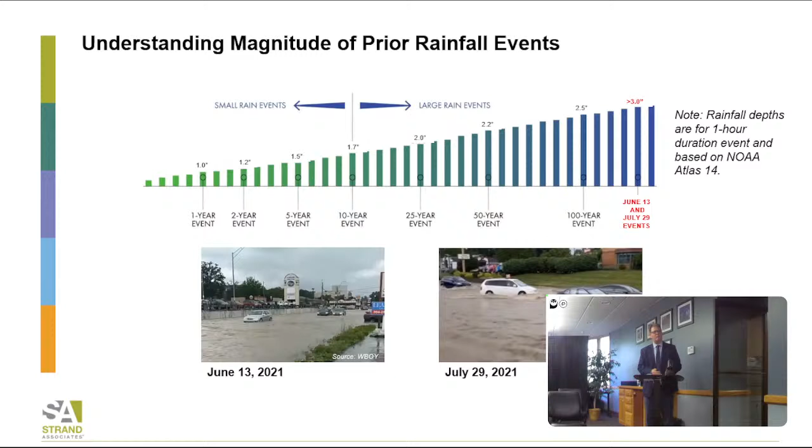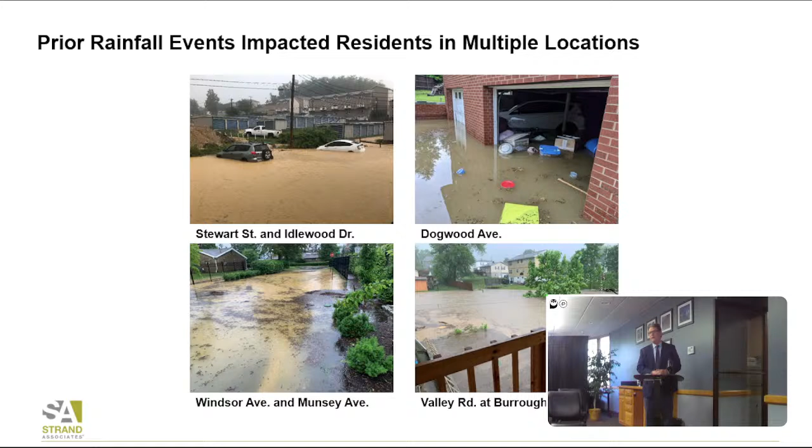Next slide, please. So the rainfall events impacted many different locations. These are photos taken either by MUB staff or by concerned citizens. Stewart Street and Idlewood, Dogwood Avenue, Windsor Avenue and Munsey, Valley Road at Burroughs. So there was significant flooding, which resulted in significant property damage for those homeowners. Next slide, please.

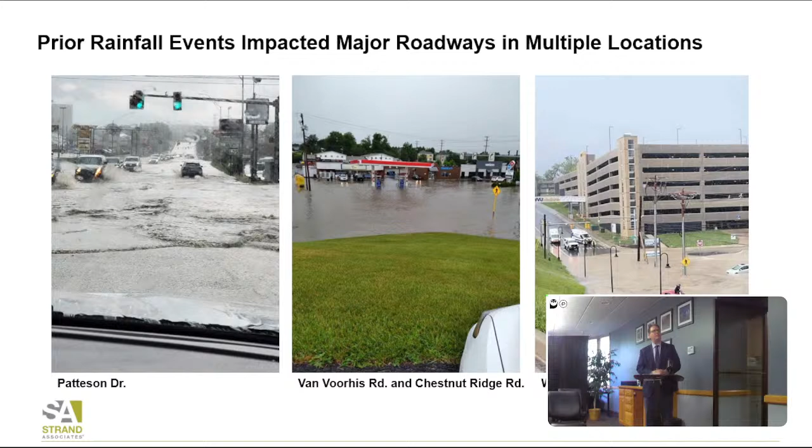Rainfall events also impacted major roadways in multiple locations. Patteson Drive, Van Voorhis at Chestnut, Willowdale and Valley View Avenue. All of those areas had significant flooding. You can see on the far right, Willowdale and Valley View, somebody's sitting on top of their car trying to figure out how to get out of that. So that was obviously a pretty significant event, and it impacted a lot of people in the city. Next slide.

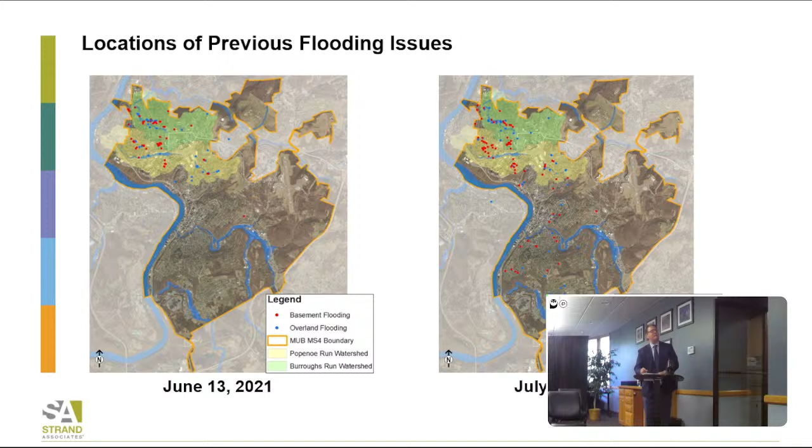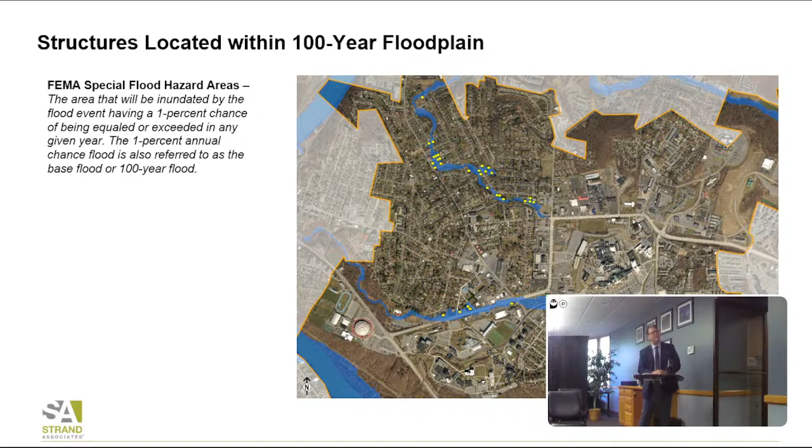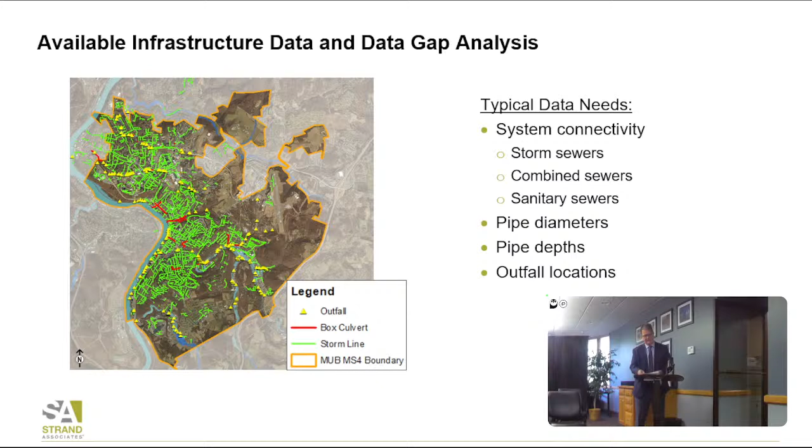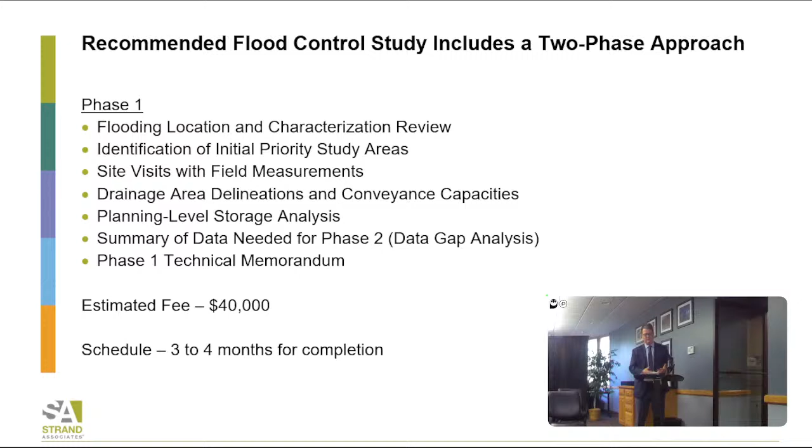There's obviously site visits and field measurements, drainage area delineations, conveyance capacity. There'll be a planning level storage analysis, so storage of various rainfall events. And then an identification of any additional data that's required for phase 2. It would wrap up in a technical memo. I think you've got an agreement or a task order in your packets where you could read more about this scope if you'd like. The estimated fee for this first phase is $40,000, and we anticipate it would take 3 to 4 months to complete.

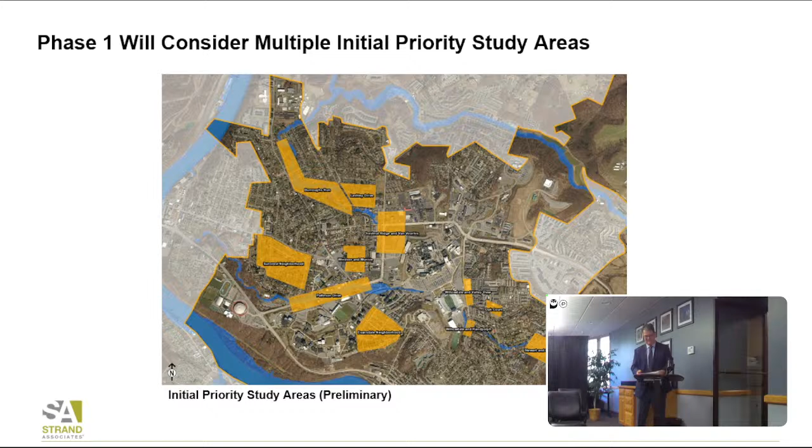So next slide, please. Recommended flood control study, the second phase. So this is the remainder of the project, and there's a lot of different things that could go into this, but one is just to make sure that we've got all the physical data, both topographically and connectivity wise. This information will be turned over to MUB to have and to use from here on forward, right? It'll be good information for MUB to have and own.

There's the potential for detailed stormwater modeling, and I'll talk more about modeling in the next presentation, but that's a definite possibility. And really, what we'd be looking at would be identifying various projects to meet the level of service that's agreed to, and then figure out what those projects look like. Dream these projects up, and then come up with a potential cost associated with those projects.

And then there's probably this iterative step, right? You might say, hey, I want this level of service, and then we go back into our caves and start looking and developing costs and ideas, and all of a sudden we come out and it's like, well, that's just not doable. And so maybe that's okay. Well then, what if it's this level of service?

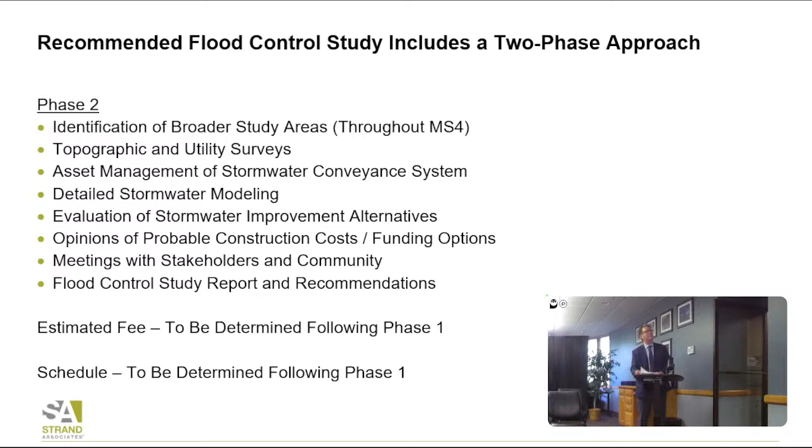So I think that's, next slide please. I think that's okay. Yes, okay, thank you.

Last slide. What are some of the things that could be used to control flooding? It could be a new storm system, larger additional storm sewer piping, larger conveyance. You can imagine what it would take to take all the water that was on those roadways and move it to one of your local waterways. It'd be some large infrastructure. So those are some of the things that we would be looking at, again, based on the level of service that is recommended or decided upon with MUB staff.

Maybe there's some enhanced maintenance activities that could be used by MUB staff. Maybe there's some property acquisitions using FEMA funds. Sometimes that's what's done in areas that are prone to hurricanes or flooding or any other natural disasters. FEMA typically wants people to not live there anymore, to move them out and put them someplace that they'd be safe.

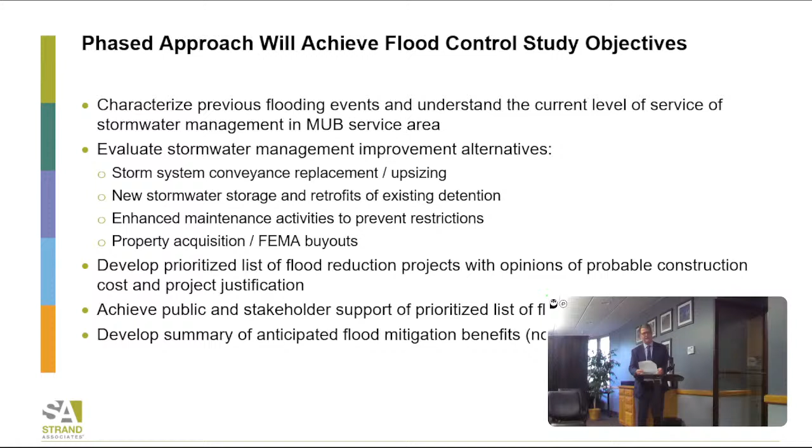So would you like to lead question and answer? Would you like me to, Michael? Yeah, we'll let the board ask if they have any questions, and then move forward with the agreement. Well, the presentation deals specifically with MUB and its infrastructure. But there are other contributing factors that are more controlled by other entities. How are we integrating that consideration? Rich, would you like to?

Sure. I'm assuming we're talking about DOH and WVU, who all have systems that intermingle with ours, and certainly they would play a large role in the upfront phase one, understanding the system. What he showed was what we could give him very quickly, and they haven't started the project yet, so this was just kind of an entry thing. But the first phase, understanding the system, doesn't mean just ours. It means every contributing factor to flooding. So certainly they would have to have a major role.

And we have been in contact with both the DOH and WVU. We've been having discussions with both of those entities. And we currently have a scheduled meeting, I think it's monthly, with both parties already. So we would anticipate that flow of information to be pretty smooth.

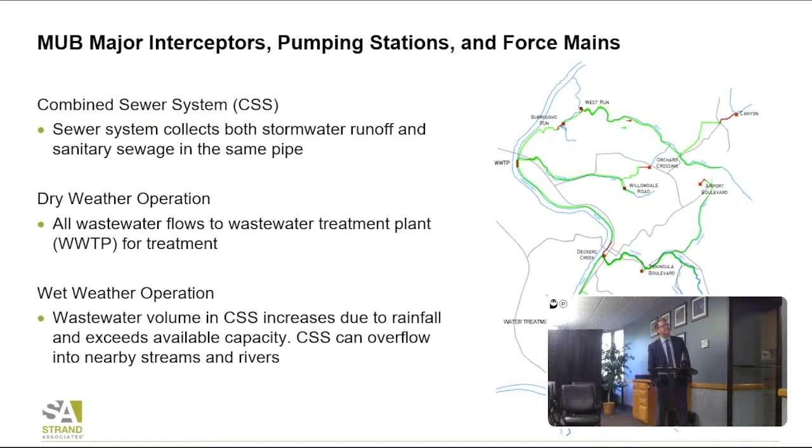So you see the wastewater treatment plant right along the Mon River and various pumping stations. Your major collection system runs up Deckers Creek, where there are areas of CSOs. So next slide, please. So CSS, combined sewer system, CSO, combined sewer overflow frequencies. The dots show, again, this is along the Monongahela River, then up Deckers Creek, and then along Burroughs Run. So that's primarily where you have your overflows right now.

So you have 40 permitted overflows. MUB is within their right to discharge, and part of the deal is that there's a long-term control plan, and it's a long-term plan because they know it's going to be large infrastructure required to control overflows to a certain amount. So 40 permitted overflows. CSOs 9, 13, and 16 were plugged, but they're still permitted right now. Those were plugged actually back in 1999. And then CSOs 8, 27, and 32 were eliminated as well and removed from the permit.

So this is overflow data from previously. And one of the things I'm most interested in looking at is, okay, here's the overflow history that's happening here. Let's see how the work that's been done over the last 20 years impacts that. And it's going to make it better, but it's not going to get the board all the way to controlling CSOs enough that you can say we're done.

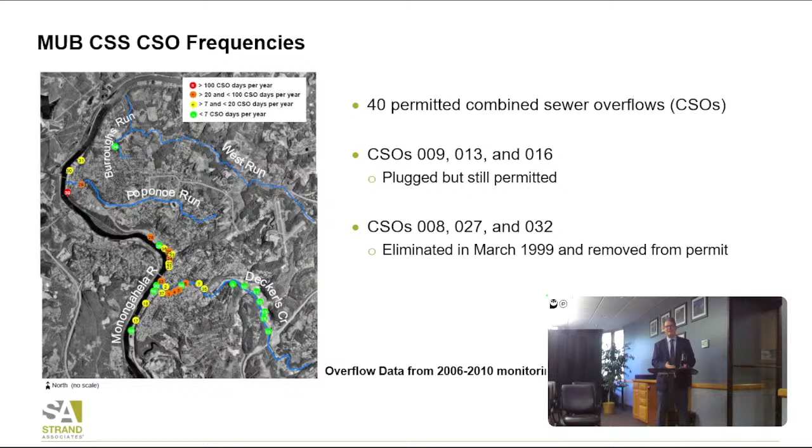Next slide, please. So I just want to go through some of the history here. Before 1994, CSOs were not regulated. In 1994, there was a CSO regulation, and one of the tenets of that was that communities needed to develop a long-term control plan. And so there's been lots of communities all over the United States, especially in Indiana, that have spent a lot of money to control their CSOs to some endpoint that they and the regulators have agreed

to is enough. So between 1999 and 2002, MUB began this CSS characterization. So it was kind of what we're doing with the stormwater system. All right, what pipes are in the ground? How big are they? What's the slope? What's the connectivity? And there were a lot of different things that were discovered during those 3 years. So there was flow metering that was done, there was modeling that was done, and there were alternatives that were developed that allowed the CSOs to be controlled to an appropriate level.

So next slide, please. So then in 2002, MUB submits their original long-term control plan. There was also river sampling that was done as well during that study. And then 2002 to 2009, MUB began implementing what were called early action items. And these early action items were things that MUB identified and Strand identified as, okay, these make sense. These projects make sense.

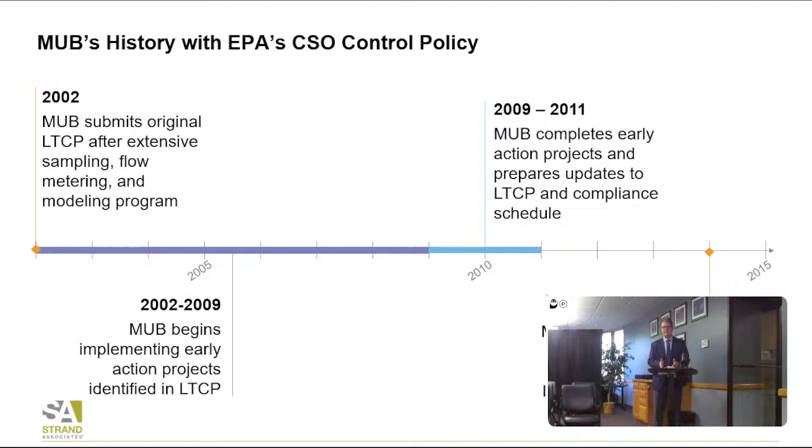2009 to 2011, those early action projects were done, and MUB submitted a long-term control plan update. And then in 2014, there was a little change of direction. There was a major plant upgrade that was required, and MUB looked at that and said, all right, we want to accomplish that first. Once we accomplish that, we'll have additional capacity at the plant, and we'll be able to treat additional flows. Let's do that first, and then figure out where to go next. Next slide.

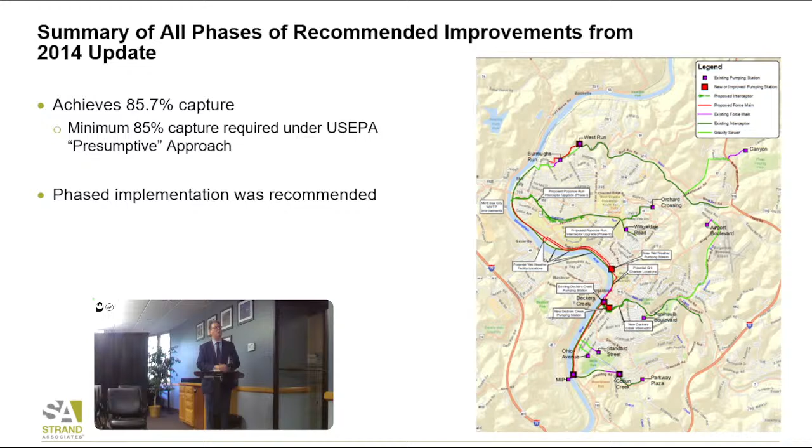Next slide, please. Okay, so your board members, you're going right to the very bottom line. I know you.

So if you look, there are certain parts of the project that are complete. So Group 1 is complete. That consisted of the treatment plant, Popenoe Run, and Central Mon grit removal. 2, 3, and 4 have not been completed. If you pull that into today's dollars, it's about $122 million. In addition to the affordability that is associated with that 122, there are also just normal CIP projects that MUB needs to do, and so those were baked into this whole thing as well.

So the report stated that only Group 1 and the CIPs, the capital improvement plan items, were affordable in the planning horizon to 2040. Now, whether DEP agrees with that or not is to be seen, because they have not approved the 2014 plan. I think they've acknowledged receipt. So I'll take the next slide, please.

So the way DEP has written this, they've written a letter back, and what they say is that the agency continues to coordinate the review and the finalization of the long-term control plan with the city. So on one hand, you say, okay, I'd rather have the long-term control plan approved. On the other hand, there's some flexibility associated with them saying, well, you tell us when you want to change something, and we'll consider it.

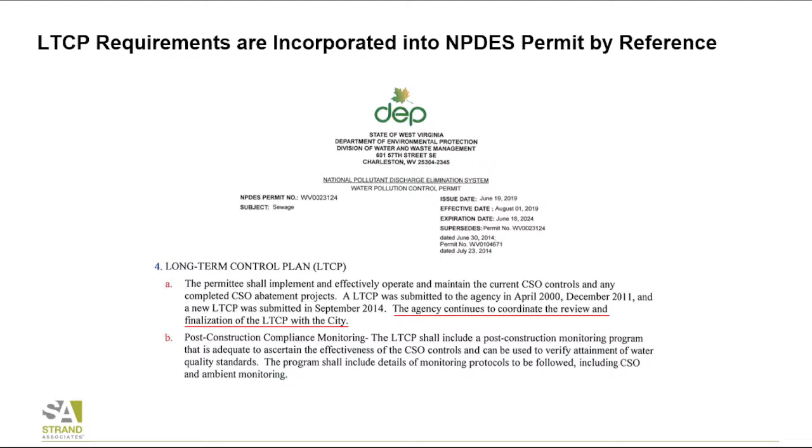So that's been the relationship that MUB has had with West Virginia DEP over the last few years, and I don't think it's the worst thing to be in that situation. You've got flexibility, you've got the ability to chart your own course, for lack of a better term. Next slide, please.

So why is an update required to the long-term control plan? So one is we want to help MUB take credit for the work that you've done. There's been improvements. There's additional capacity. We want to be able to demonstrate that and share that with DEP. We want to be able to affirm MUB's long-term control plan strategy.

We've had this conversation that the direction of the long-term control plan was charted by people that are no longer sitting in this room. And so we want to make sure that this is still the direction. And these are going to be major infrastructure projects, and if that man right there in the red shirt isn't shaking his head up and down thinking this is a good idea, it's not a good idea. And so we want to make sure that there's some time to get everybody on the same page.

And then the last thing is supporting a request for more time. So the long-term control plan does two things. One part of the long-term control plan says, okay, what are you gonna control to? And then the next thing it says is, okay, well, when are you gonna be done?

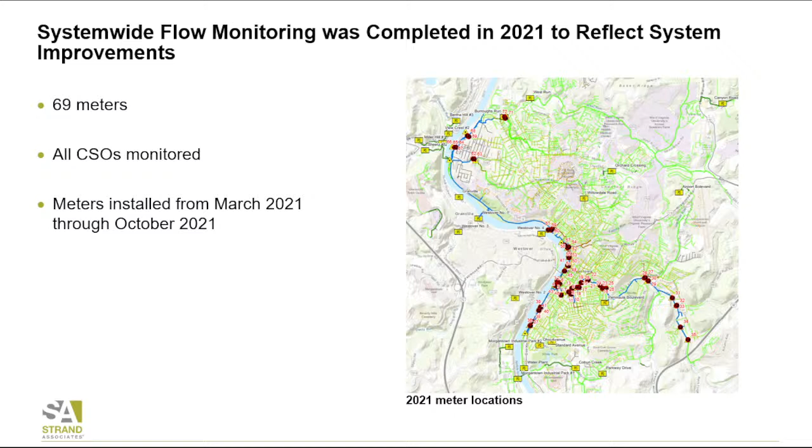So again, system-wide monitoring, as Mike identified, 69 meters were put in the ground, all CSOs. The overflows themselves were monitored, and the meters were installed for quite some time. Next slide, please.

So the long-term control plan scope items. The goal of this whole exercise is to be able to develop a new long-term control plan. So, the collection system characterization, check mark, that's done. Hydraulic modeling and agency coordination, that's what we're talking about right now. Treatment and conveyance alternatives and preparation of the long-term control plan report itself, those are two things that still need to be accomplished. So next, or click, please.

All right, so phase 1 is identified here, and essentially this is a modeling phase to be able to determine how well the system is performing, comparing it back to that 2002 report and flow values.

We think that there's definitely a need to have agency coordination as well, and to make sure that everybody within MUB fully understands what the recommended plan was, so we can figure out where to launch to the future. So once phase 1 is complete, next click please.

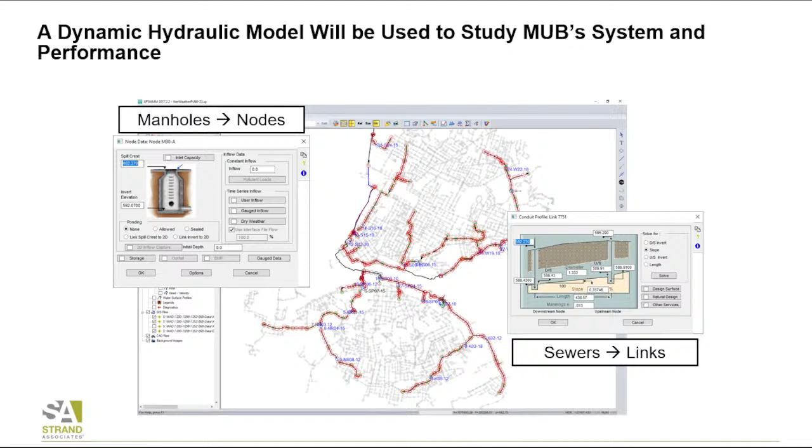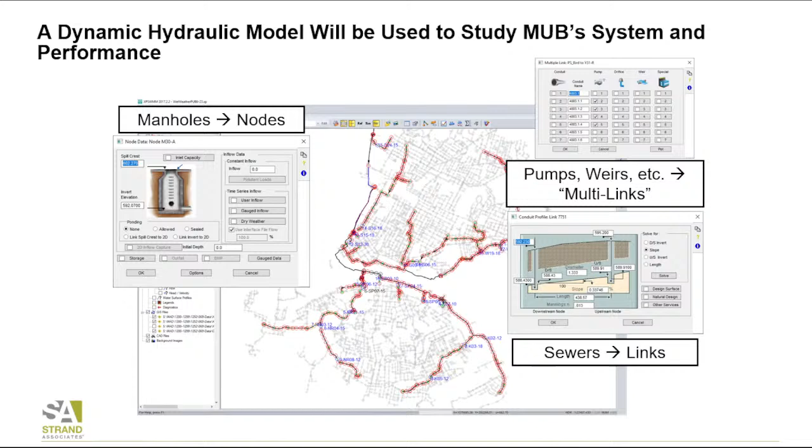Okay, so every manhole that's in your system is a node, and so we make that a node, and then next click, please. The sewers in between those manholes become links, and then click. The pumps or the weir overflows that control the amount of flow that goes either to the wastewater treatment plant or out to the river, those are all modeled using what's called multi-links. And so everything that's in the ground gets modeled virtually. Could you click it again, please? Okay.

The whole idea is essentially when it rains, we want what actually happens in the system to be modeled, and we make that comparison, and we calibrate the model. And once we get that calibrated model, now we can start doing what ifs. Okay, you have an 18-inch sewer and there's a problem in this area. What if we made it a 42-inch? Okay, 42-inch conveys all the flow, but now there's an issue downstream, it moves down to here, but we still haven't really solved the problem.

And so there's usually a series of projects that all work together in concert to meet, again, we're trying to meet the 85% capture. So sorry, I went off script. So the collection system calibration determines how much rainfall enters the system. So rainfall derived inflow and infiltration.

Inflow is water that comes from a direct connect, a downspout connected right to your sanitary sewer. That's an inflow spot. Infiltration is you've got a crack in your pipe, and as the ground starts to become saturated, water leaks in, but it's not really a direct connection. Everything gets saturated, and then all of a sudden this pipe starts to drain the ground instead of draining the waste that you were hoping it was going to.

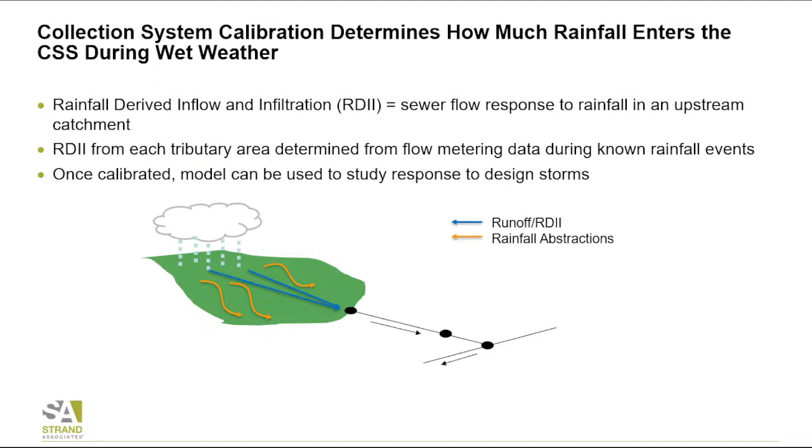So we look at this rainfall derived I&I, and we start turning knobs in the model to make sure that the amount of flow that hits this sewer shed actually gets into the sanitary system or the combined system. And we use the rainfall data that was collected, and then we calibrate the model. Let's click here. Is there a slide that I added? No, I didn't.

Okay, so we try to mimic the response curve, and so we'll have a flow meter, and the flow meter says the flow goes like this. Well, if our model says the flow goes like this and it doesn't match it, we're like, okay, we need to tweak some knobs in the model so that they match, and we get the model so that it does a good job representing what actually happens.

So last thing here is the model can quantify flows that leave the system and result in a CSO. This is a dynamic model, and if we're going to demonstrate that the system collects 85%, we will manufacture an average year's worth of rainfall events and run it through this model.

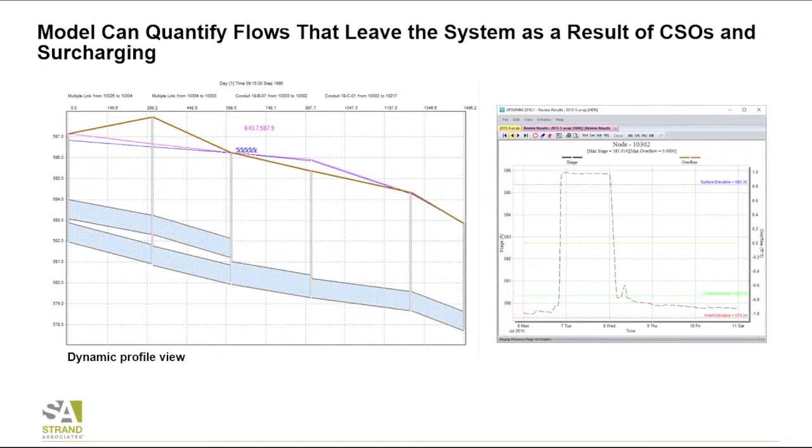So 365 days worth of rainfall goes through this thing, and we monitor and we say, okay, well, when do we get to 85%? We start adding projects in or taking projects out to hit various levels of control. Next slide, please. And that's it. I'm going to take a breath.

Right, right. Maybe I can get my son to be interested. I love all that stuff. I have my students do it a lot. It's a great way to learn. Okay. Very, very informative. Any questions? No, I really enjoyed that.

Getting that out. Yeah. Are we unique in West Virginia with DEP acknowledging receipt rather than approving our long-term plan?

Not completely, not completely unique. I mean, I can tell you the situation you want to stay out of. You want to stay out of a situation where the only way you can change projects in your long-term control plan is that you have to go back and talk in front of a judge. You don't want that, because you don't have much flexibility there.

I'm familiar with the national EPA coming after cities with consent decrees back in the late aughts. Right. And that's definitely not the situation you want to get in. And most of the time, if you actually showed up to meetings and showed an effort, that didn't occur. Right. Yeah, I mean, it's usually a board or a governing body that says, come and make me, and they did, right? Because before 1994 it wasn't, and then it was, and then people needed to respond to that.